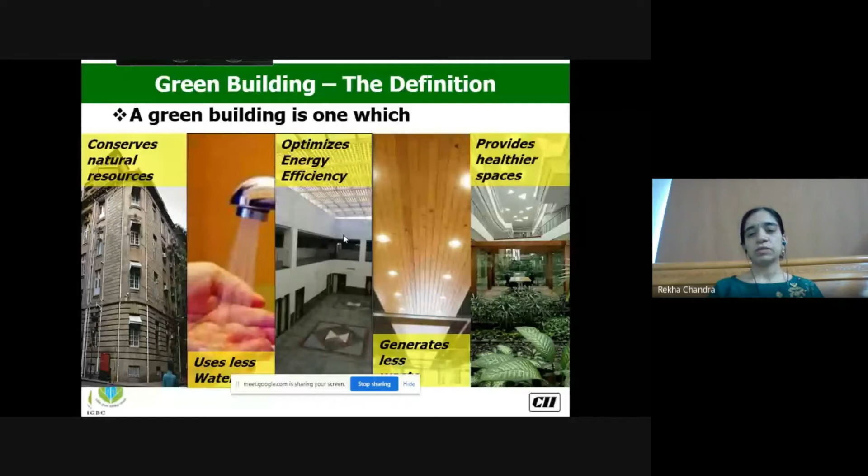Then, generate less waste, because we have to reduce environmental pollution as well. This generating less waste is not just an India issue—globally, we have an issue about it. I hope I am clear, right? Is there any issue? No, no issue, yes, you can proceed.

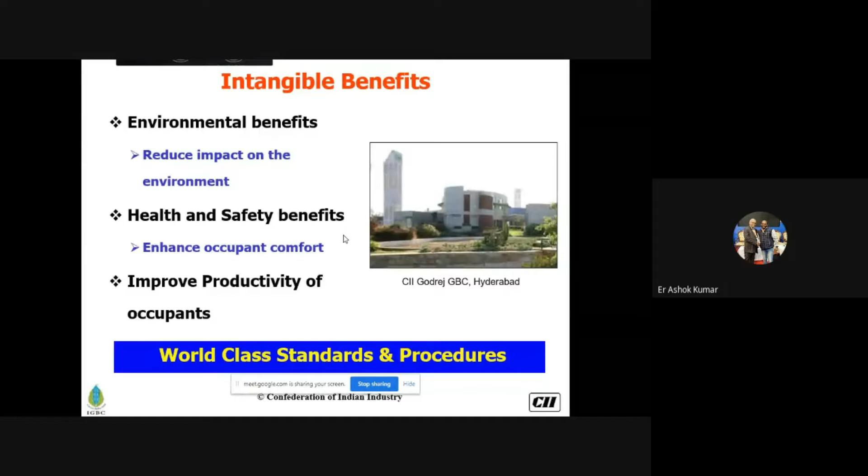Of course, health and safety is also important, because these days, the current pandemic situation requires us to give importance to the health perspective and the well-being of occupants. In green building concepts, we are addressing these aspects also, so that buildings are benefited. When you increase the health of the people, productivity also will definitely increase. So these are the intangible benefits we see in green buildings—this is just the definition, to show you what we mean by green building and the benefits we achieve.

Further, on the green building movement in India—our chairman and the principal have already indicated our journey over the past two decades. To re-emphasize, IGBC is part of CII, Confederation of Indian Industry, which is more than 125 years old, and IGBC is one division of CII. IGBC was formed in 2001 with a vision of providing sustainable built environment for all. When we say built environment, we are not just restricted to buildings—it goes beyond buildings, to wherever we stay, learn, or transit. We want to emphasize converting all these places into green. Another vision is for India to be one of the global leaders in sustainable built environment by 2025.

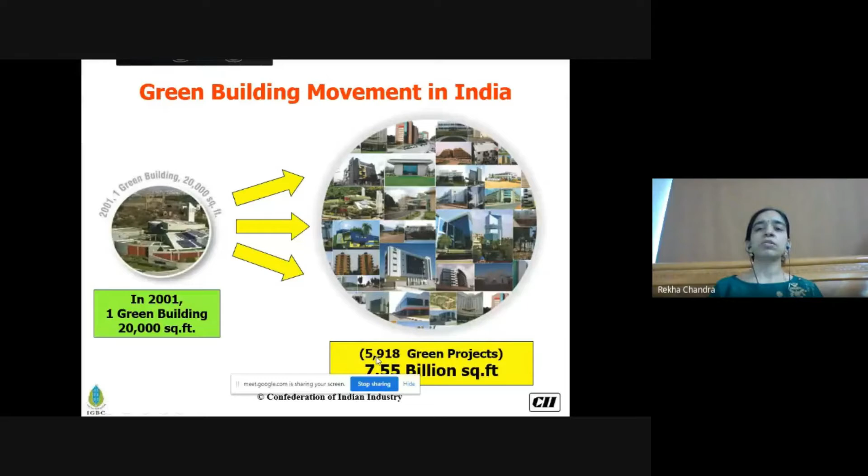As I said, the green building movement started in 2001, with a 20,000 square feet building, our own building. Right now we have about 5,900 projects, which is about 7.5 billion square feet, making India one of the top 5 countries in terms of green building footprint. And it's still going on.

So how have we achieved this? Since demand was increasing and there was more awareness, IGBC is the only council to have 26 rating systems. Rating systems are nothing but green building guidelines for different building sectors that we launch, where projects can refer to these guidelines to construct their buildings, and also for operation and maintenance in a sustainable way. These guidelines give them a reference.

So we have about 26 rating systems cutting across various sectors: commercial buildings, offices, and IT buildings can refer to these. We have residential rating systems for homes, both existing and new. And we have systems for schools, hospitals, and even transit, in terms of railway stations, metro stations, and factories. So all kinds of places where we live, work, play, transit, or work - we would like to transition them into green buildings.

Coming to the IGBC services, we developed the standards. As I've indicated in the earlier slide, we have developed about 26 rating systems, and still there are many more. Other rating systems are also in the pipeline.

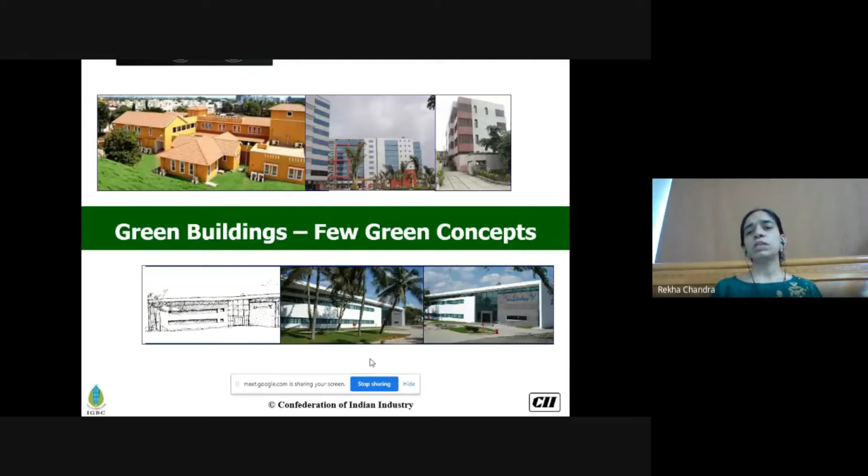Coming to the green concepts. Since we are entering into the student chapter, and you should already be aware of green buildings, I'd like to give a holistic approach of what we take into account in green buildings. First, we cover the site, because you have a site for site planning and maintenance. Then we talk about water, an important natural resource. We cover materials, energy, and indoor air quality, which is also important. So these are the five concepts, and under each concept we have detailed aspects which we'll be covering.

Now, coming to the sites, what is a present challenge we see? We see all the cities becoming concrete jungles. Wherever we go, we see completely concrete jungles and buildings only. So what's happening because of this? First, we see there is less biodiversity.

We all agree, whether principals or lecturers, that when we were younger we used to see house sparrows, pigeons, and crows around us. But right now, in current urban cities, we don't see butterflies or beautiful birds around us. So we are losing the biodiversity, the ecology.

In terms of heat islands, you all experience this challenge. If you go to a park or to villages or rural areas, you'll feel cooler and happier, seeing the beautiful greenery. But in our cities, especially Bangalore, which we used to call the green city and the pride of Bangaloreans, we are now depleting that greenery. We are worried, seeing a lot of pollution everywhere and more heat coming.

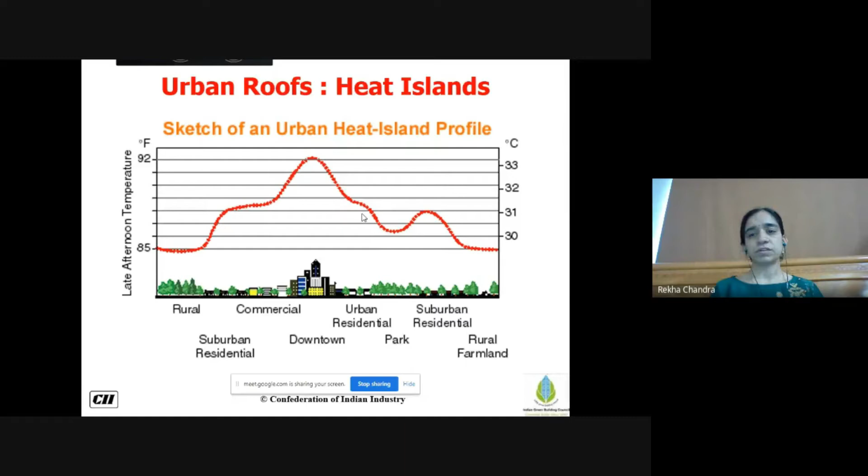So these are the challenges we are seeing. To overcome this, as part of green building concepts, we encourage greenery. More vegetation is encouraged in green building concepts so that you can attract a lot of habitat and also maintain microclimate temperature.

This is our CII building where the IGBC secretariat is located. You can see in this bird's eye perspective so much greenery around us. The site is over 5 acres, and only 2 acres have been disturbed—3 acres have been kept undisturbed, so whatever habitat is there can be retained. We feel proud that more than 30 varieties of birds flock to our site, despite being in the center

of the IT hub of Hyderabad, in HITEC City. Hyderabad has become famous not just for biryani and pearls, but also for being an IT hub. In the heart of this IT park, around this building, we attract about 30 varieties of birds and even butterflies—we have a butterfly garden too. So we are attracting habitat, maintaining biodiversity within the urban city, and also reducing microclimate temperatures.

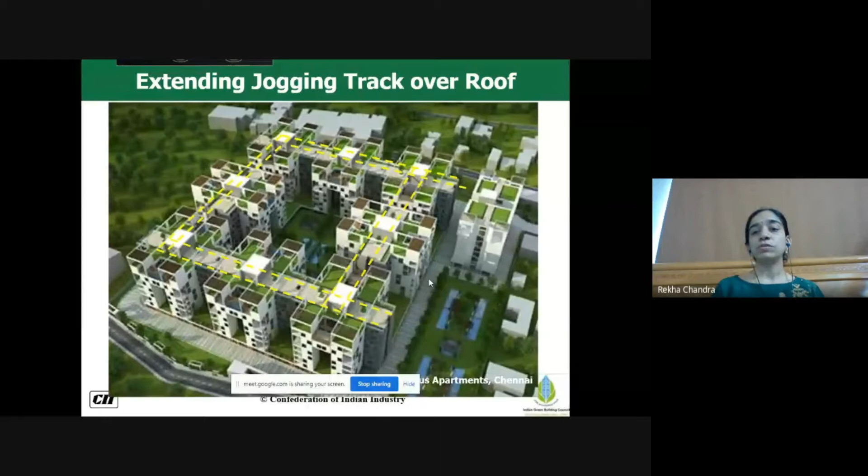And over the roof—even on the roof it's not restricted now—many green roofs are coming up. One residential area, having less space on the ground, created a green roof as well as jogging tracks over their roof, creating physical activity space as well as greenery to reduce heat islands on their roof area.

So this is how we are trying to address the challenges over the site planning. And not only green roofs - because of this green building movement, there is a change in the way we see the roof area. Earlier days, if we go back one and a half decades, the roof used to be covered, especially in commercial buildings, only with utilities - your service area, whatever air conditioners and compressors were there. But right now the roofs are converted into green roofs, and also they are trying to have solar panels, which is an alternative energy source.

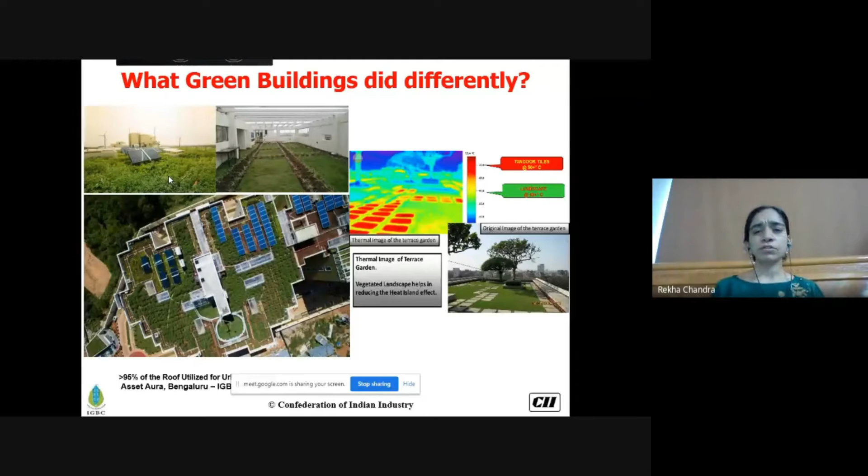So there is a complete change in the way people see and use the roofs as well. And also there are a few projects where they are growing organic gardening on the roof, so they get their vegetables as well on the roof. So there are a lot of things we have to just open up and see how we can overcome the challenges which we are facing.

And we see a lot of depletion of groundwater as well, because most cities, as I've mentioned earlier, don't have enough groundwater, so everybody tries to buy water during summers. And also there is stress on municipalities because of rapid urbanization - people moving to urban cities require a lot of demand on water, so there is stress on municipalities as well.

So as there are challenges, we are trying to address through green building concepts how we can conserve water in your building site. We go with the 3 R's - the famous R's in terms of reduce, reuse, and recharge. Reduce - when I say reduce, the first thing we should try is to reduce whatever we are consuming.

How can we reduce? The appliances which take water, especially plumbing fixtures like your water closets and taps, we recommend you go for efficient fixtures. To give you a simple example: conventionally, a water closet tank would have an 8 liter capacity. Whenever people use a single flush water closet, they flush 8 liters at a time. As per international standards and plumbing codes, a person would require 2 half flushes and 1 full flush in a building, whether it's an office building, college, or anything.

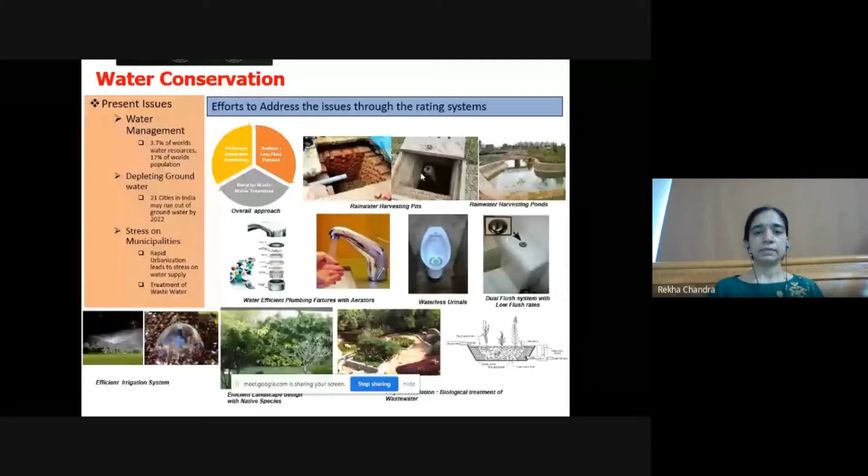So through this 3 R's approach, we are trying to reduce water consumption in buildings. And as I said, there are a lot of new technologies coming.

In terms of wastewater treatment, I would like to introduce one new technology we call phytoremediation. Usually, 90% of projects use the mechanical sewage treatment plant to treat wastewater. This is a new trend of treating wastewater biologically. The plants filter the water, and whatever wastewater comes in, the filtered water can be used. So we call this the phytoremediation process.

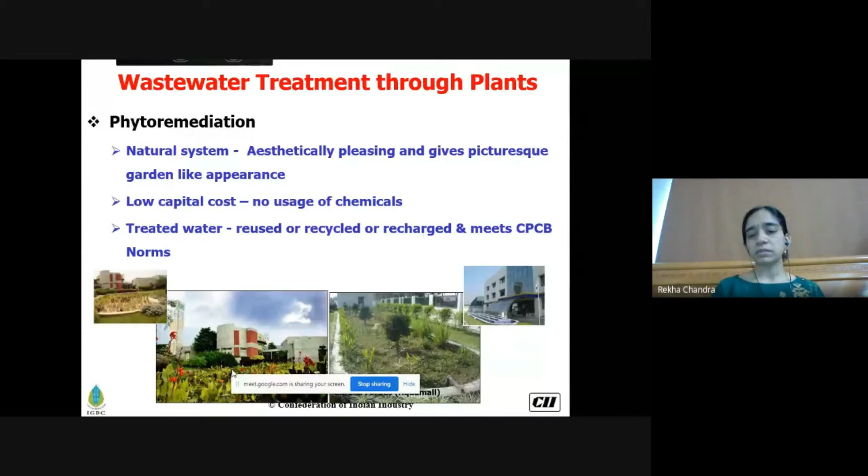It's a natural system where treatment is done through plants, and it has low capital cost because there's no additional maintenance. No electricity is used, so there's low capital cost, and the only maintenance is pruning of these plants. This is what we have implemented in our own building, running since 2014, and it's been successfully running for the past 5 to 6 years.

To briefly explain, we have a septic tank where solids get settled, and the gray water we pump through the plant system we have. There are two levels of ponds: first is a filtration pond, then a polishing pond. In this filtration pond, we have different kinds of wetland plants. Generally, in photosynthesis, plants release oxygen through their leaves, but these specific wetland plants release oxygen through their roots.

In the mechanical process, what happens is they artificially induce oxygen, so aeration happens and they treat the wastewater. In phytoremediation, when wastewater flows through the roots of these plants, because of oxygen presence, they treat it, and it's further filtered.

The next level we call polishing, where further polishing of this wastewater is done. We collect it in an underground sump and reuse it for gardening. So it's a simple biological process, but scientifically proven, because a certain level of aggregates and different levels of plants are used—not all kinds of aggregates or plants can be used. These are scientifically designed according to the contaminants present in the wastewater. Accordingly, they choose the plants and treat it. So there is no operational cost, only pruning of these plants.

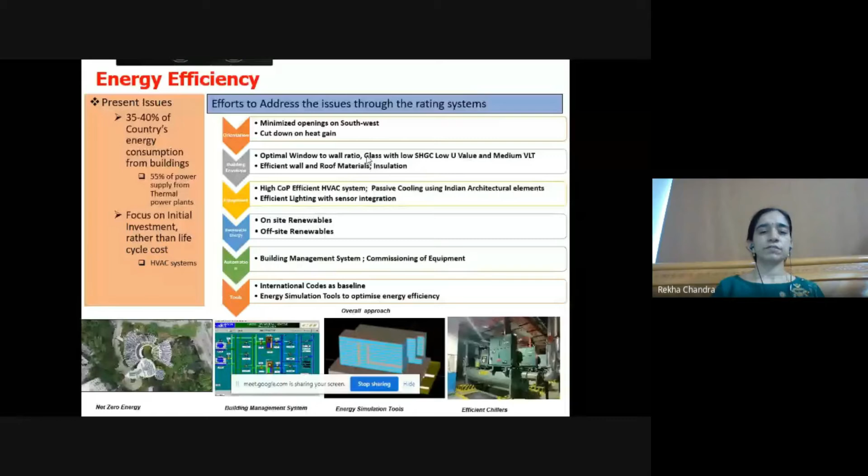In terms of energy efficiency in the green building concept, we try to encourage various aspects even from the design stage, because energy can be conserved if you have good design. You can go for a good envelope — meaning whatever exterior materials you choose, if they reduce the heat coming inside your building, your heat loads will reduce. The orientation of the building also matters, and being civil engineers taking part in construction activities, even the orientation of buildings and the way openings are placed inside the building will have an impact on reducing energy consumption.

So we recommend all kinds of different aspects — what materials you can choose to reduce building heat loads, what orientation to use, how much openings you should keep, your window to wall ratio. All these standards we refer to, both international and national, which IGBC generally uses as guidelines. In terms of energy, we have the ECBC code, which is getting mandated in most cities in the country. So we recommend ECBC baselines and go for efficient systems. We also recommend on-site and off-site renewable energy systems and building automation systems, so that they can be regularly monitored and maintained well.

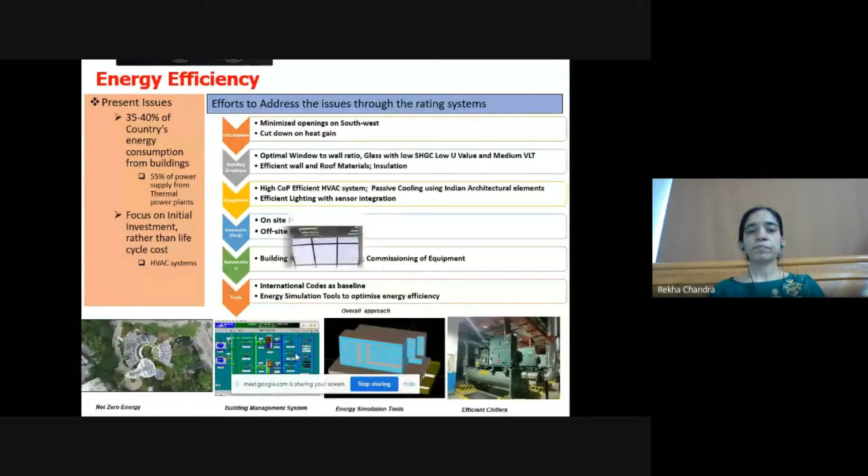As I said, we recommend a high performance envelope, a good envelope. Whenever you have good insulating walls, you can see these cavity walls acting as a heat barrier, along with insulation, to reduce the heat coming inside your building. Coming to glass, there is a lot of debate — people talk about whether glass absorbs a lot of heat, and why people are still encouraging its use. But if we look at new innovations, there is glass with very good U values and SHGC values coming up, which will not allow heat to come in.

In our own building, we have used double layered glass — two layers of glass filled with inert gases, so they will not allow heat to penetrate through the glass. There are a lot of new innovations in glass as well, which can reduce heat coming inside the building while still allowing the daylight we require to come through. So we recommend an efficient envelope to be chosen. Even the roof can be insulated properly. Wherever there is heat penetration, we recommend using good materials.

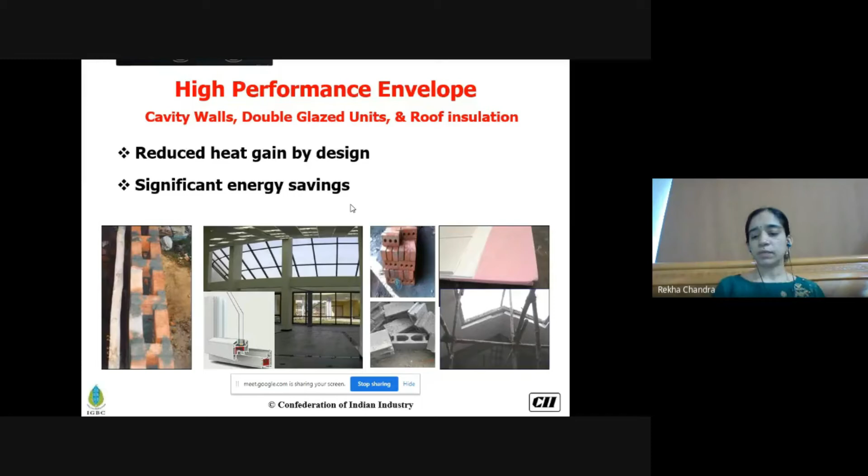When I talk about orientation — since India is a tropical country, mostly the south and western sides of sites absorb a lot of heat. So we recommend fewer openings on that side, and more openings on the north or east side where there is less heat. These are the kinds of guidelines we recommend as part of the envelope, and this is what we did differently compared to earlier green buildings.

If you take efficient systems, just as we spoke about water efficient fixtures, even in energy there are efficient fixtures now. Earlier, the one tonnage — we generally talk about tonnage for split ACs at home, 1 TR, 2 TR ACs and so on — used to cool only 150 square feet of room area. But right now, because of the green building movement and a lot of awareness and new innovations, the same 1 TR is able to air condition up to 600 square feet.

So you can see how much change they got, with less consumption of energy. With just 1 TR, you're able to cool more space, so your energy consumption is reducing. High efficient chillers, as I mentioned earlier, we call chiller performance COP in the HVAC systems. Earlier the COP of the systems used to be 3.5, but right now they are available at 6.5 COP, where they can efficiently cool the building while also reducing energy consumption.

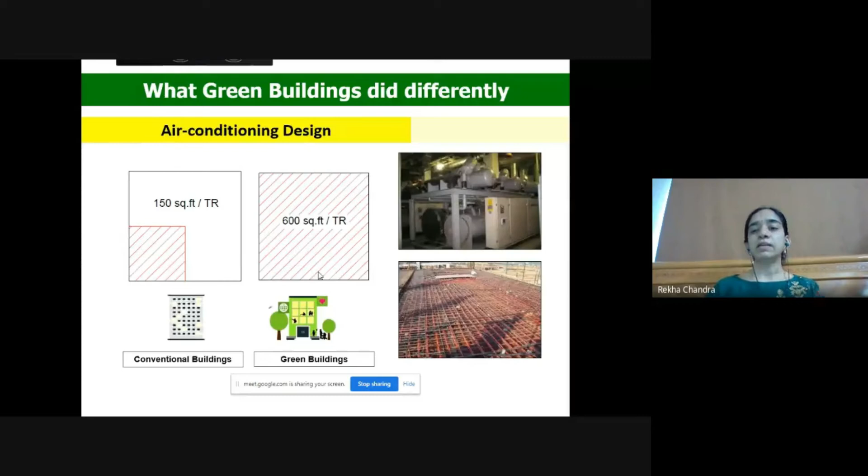Daylighting is another important aspect in energy, because next to air conditioning, lighting is the one which consumes a lot of energy. So we recommend having lot of daylight, because India is rich where we get good sun and lot of daylight.

So we can use this daylight to the maximum level and reduce energy consumption through artificial lighting. And of course, as I said, alternative energy sources - new trends have come in the country. People are not restricting to rooftop solar panels or windmills. There are building integrated photovoltaics available now, where even on building facades they can install BIPVs and generate power.

And further, now there is another new technology where the solar panels are bifacial solar panels. Last year we implemented this in our own building, and we converted our building to a net zero building as well. So these panels generate power not only from the top but even the down part. First, you can see what we did - our roof was painted with high SRI.

SRI, solar reflectance index, which will reflect the heat and not absorb it. So we used that paint. Through the gaps of the panels, whatever heat is getting penetrated, the roof will reflect it back, and that reflected heat will be absorbed by the underneath solar panel as well, and they will generate electricity. So not just the top part, even the down part can generate power.

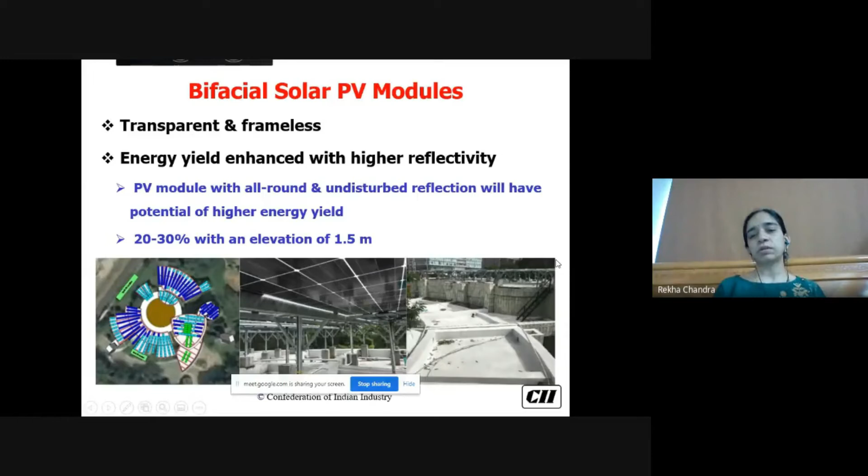So there's a 20 to 30% gain, but certain design elements have to be followed - there should be an elevation of 1.5 meters, so that it can properly capture the heat, reflect it, and generate power. We have installed about 130 kilowatts of solar panels right now, and our building has completely become a net zero building. So whatever we are using has been generated back to the grid.

Because of this lockdown, in fact yesterday we had an internal team meeting, and our team indicated that whatever power we are generating, we are giving completely back to the grid, because there are no operations in the office. So you can see you're reducing the demand on the electricity you're taking, and also reducing the demand on electricity generation and the depletion of natural resources.

So this is what globally people are looking at. People are not restricting themselves to saying I should have 20% savings or 30% savings. Right now people are looking to become net zero energy, net zero water. So whatever I'm going to consume, I should give back to my environment. That's how people are working towards it. So that's in terms of energy.

Coming to the fourth module, in terms of materials - what challenges do we see? There is a lot of waste going into landfills. Materials generally generate waste, right? So there is a lot of landfill, and because of that, challenges happen in terms of environment pollution, because of materials. And we are using so many materials, right?

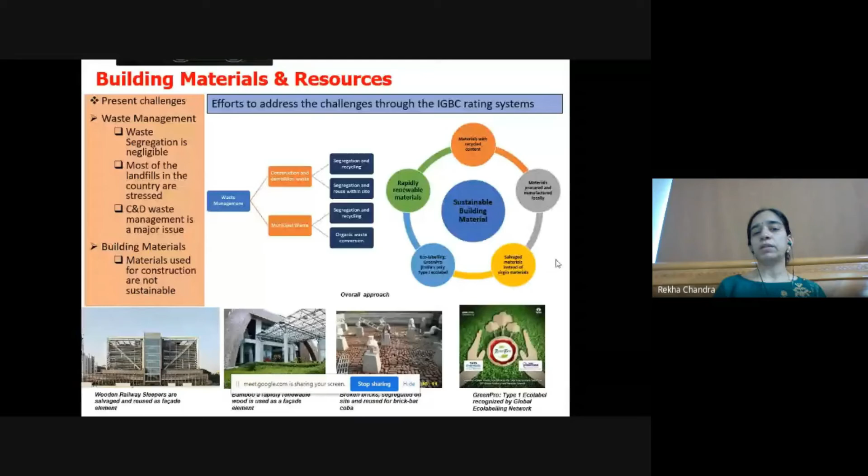We address this through the 3R approach: reduce, reuse, and recycle. These are the sustainable building materials we encourage. The first thing we talk about is building reuse. Most buildings, whenever they go for renovation or refurbishment, the conventional way is they completely demolish the buildings and go for new ones. By doing this, a lot of construction and demolition waste is generated, and again you're using a lot of new resources.

So what we recommend is you can analyze the building you want to renovate at first level, and see if it is structurally good, and if you can use certain elements back. That way you'll reduce construction waste from demolition, and also reduce the new materials needed for renovating the building. So we recommend building reuse as one aspect.

Then there's salvaged materials. Whatever materials have already been used on some other site can be brought into your project, repaired or refurbished, and reused. These are called salvaged materials. An example is railway sleepers.

A lot of railway sleeper waste is generated in railway workshops, so many projects get those railway sleepers and use them in external facades or other ways. Also, nowadays people commonly take waste tires and use them as garden elements or in toddler areas as swings. That's also a salvaged material. By doing this we reduce the use of new virgin materials, extend the life of these materials, and reduce landfill.

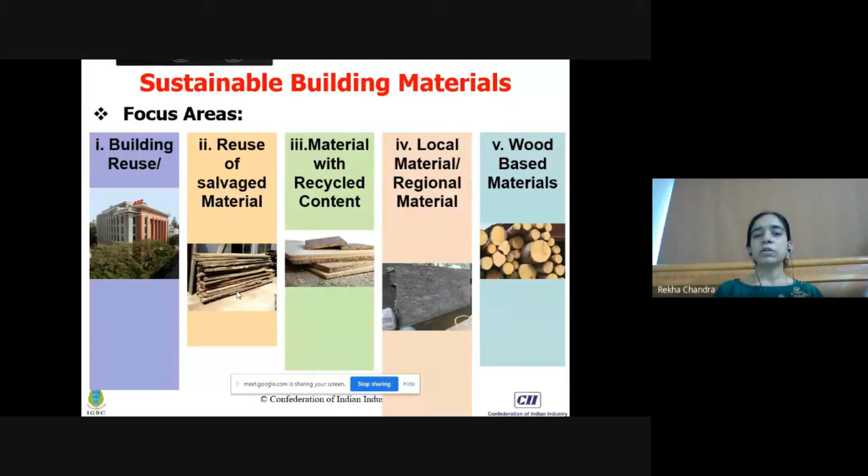Last but not least, wood-based materials. We recommend composite wood rather than pure wood, because pure wood like teak and rosewood trees take 25 to 30 years minimum to grow before they can be harvested as wooden logs. But there are composite wood materials like MDF and plywood, and rapidly renewable products like bamboo, sugarcane bagasse, and eucalyptus-based wood materials, which we encourage so they won't impact deforestation.

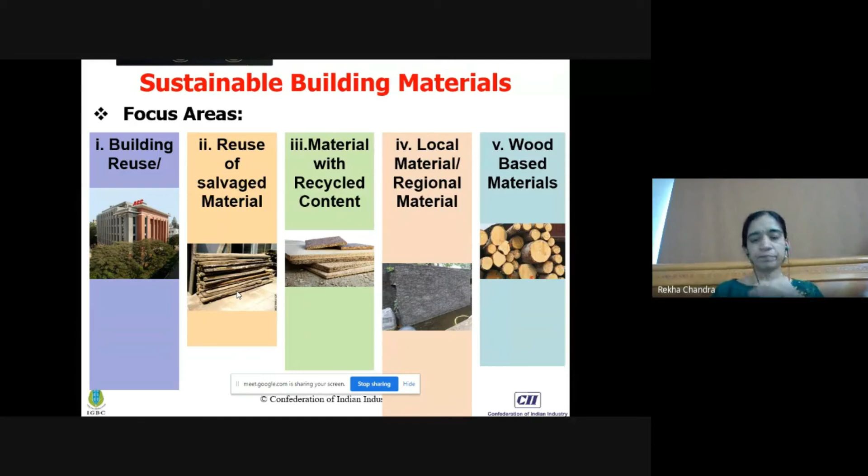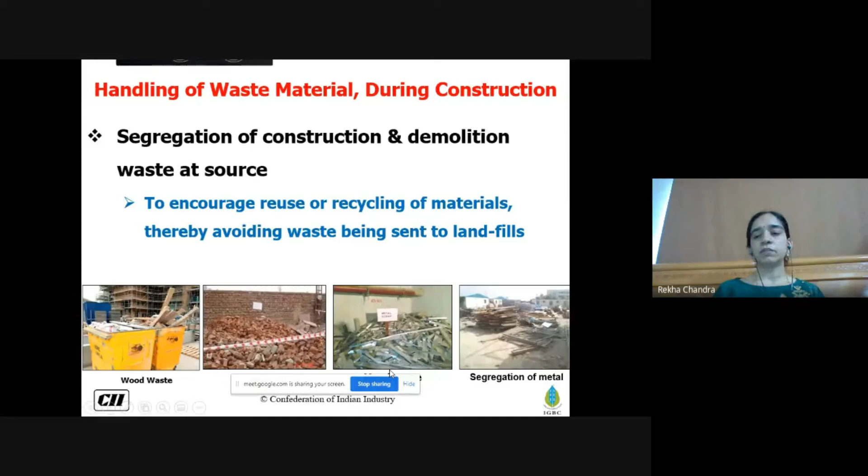In terms of waste, there are two waste levels during construction. We recommend you segregate the waste - you can see in these pictures where projects have segregated the waste generated separately. This segregated waste is either reused within the building or sent for recycling, reducing landfill.

At post construction, when occupancy begins, we recommend proper waste segregation on site - dry waste, wet waste, everything segregated properly, and sent for recycling purposes. Organic waste can be treated within your site, making good compost for your vegetation area, while other things are sent for recycling.

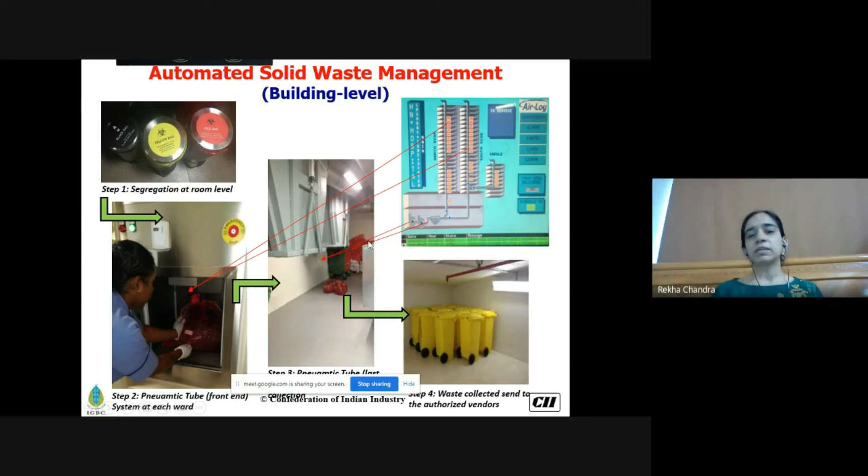New innovations include an automated solid waste management system where each floor level has an opening. When you throw waste in, it comes down through chutes and gets collected in a centralized area, making it easy to send for recycling. So this is what's happening in terms of waste management.

The last module we are addressing, which is important, as we said, is that we are building for people, so we should make it more comfortable. We see a lot of impact on air quality in Delhi, Bangalore, Hyderabad, wherever we look - we talk about air quality problems.

So how are we addressing air quality and health impacts? We address air quality through fresh air ventilation. We recommend a lot of fresh air coming into your site and building. When you take more fresh air, people will be more enthusiastic, because if there is less fresh air, people will feel headache, nausea and lethargic. So we recommend proper cross ventilation and fresh air inside the building.

We also recommend that interior elements, whatever you are choosing, should have low VOCs. Interior elements like paints, coatings and adhesives should have low volatile organic compounds, because when they are low, they won't impact human health. Maybe you've observed that if it's newly painted and smells very badly and you feel allergic to it, that means the paint had a lot of VOC content. So we recommend low VOC interior materials be used to reduce impact on human health.

For air quality, whenever we say fresh air should be taken, remember outdoor air also has a lot of pollutants. So we recommend having good filters in your HVAC system, so that filtered fresh air can be taken in, which can improve productivity.

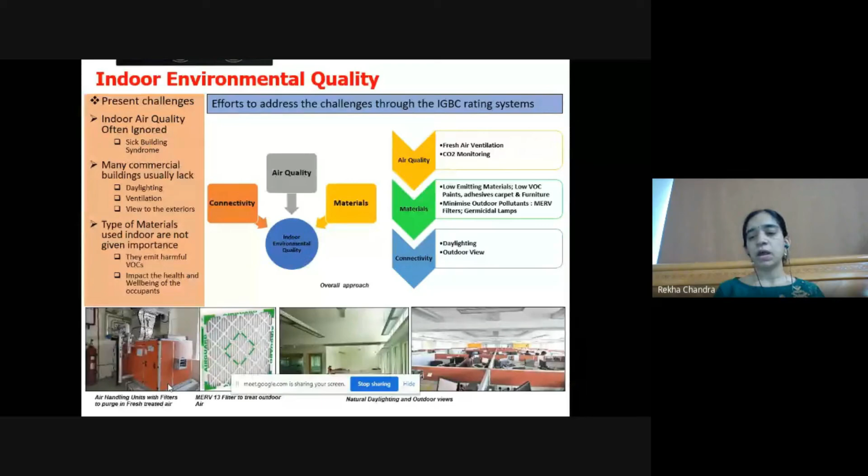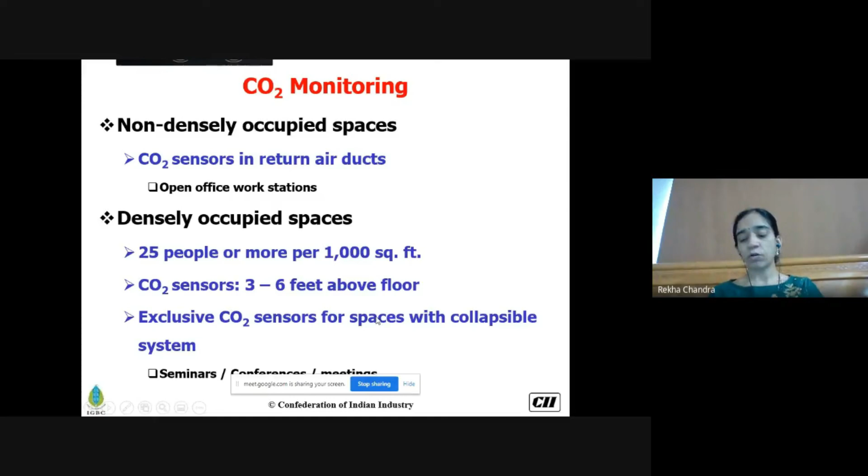CO2 sensors are one of the important aspects we encourage as part of fresh air management in buildings. Generally in malls or theaters, because there is more occupancy, sometimes after some time you feel nausea or headache because there is high CO2 emission and less fresh air. So we recommend CO2 sensors be installed in buildings with high occupancy, so CO2 levels can be regularly monitored and fresh air purged properly, so people don't feel uncomfortable.

This is how CO2 monitoring is generally done. They install CO2 sensors, and because of occupancy, whenever CO2 levels increase, they give an alarm to the building automation system, which then allows more fresh air to come inside the building so levels can be maintained.

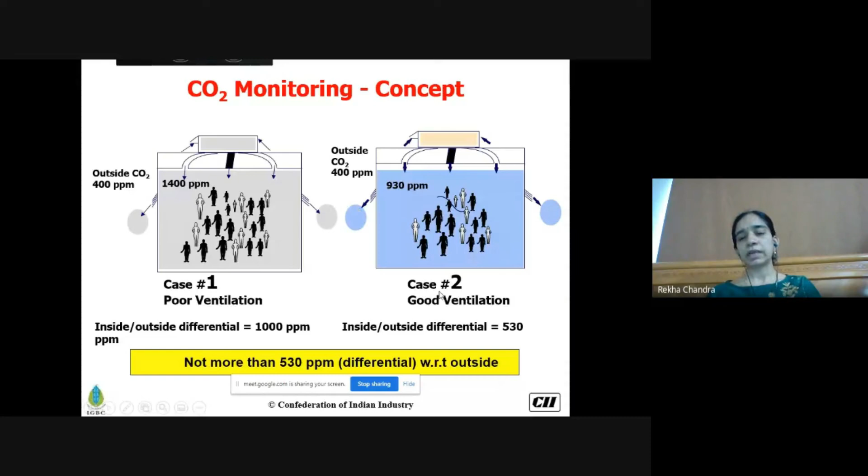As per the standard, if you compare outside and inside CO2 levels, it should not be more than 530 ppm differential. If it is more, it's a bad design; if it's good, you can see in the second picture where it's a well ventilated building. So that's about the overall aspects.

I know if I get into more depth, these are vast subjects. I've just given you insight into the green building concepts we are working on.

Coming to the student chapter we have launched today at Atria Institute of Technology - as students, what can you do? You can be part of our various IGBC awareness programs we conduct, not just on one subject. We can get deeper into each subject we spoke about today. I can speak in depth about phytoremediation, wastewater treatment, and how to improve health and comfort of people. There are a lot of lectures on different subjects, so you can be part of these awareness programs and initiative forums.

You can create chapters, and Bangalore is one chapter that is very active, and a lot of chapters do various initiatives like walkathons, rallies, and plant saplings. You can take part in these initiatives.

Every year in the third week of September we celebrate World Green Building Week, and today we are launching exactly on time in September. Of course the poster is different each year, but this year again, in the third week of September, we celebrate World Green Building Week, and we encourage all of you to be part of these celebrations.